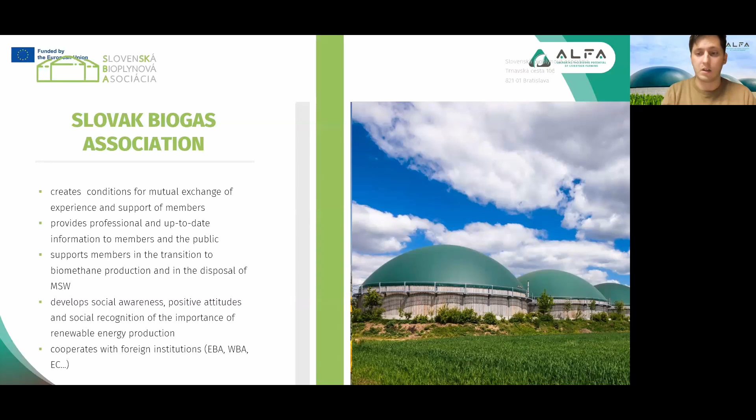Okay, maybe the overall structure of the association. We have specialized working groups, 3 working groups focused on energy, biomethane, and environment. The energy group focuses on heat and electricity. Basically, each group covers practical issues and the regulatory landscape as well. We are trying to address both technical and policy perspectives. We also prioritize education and public relations activities to promote understanding of biogas, as I've already mentioned.

Here we can see some examples from our field visits to biogas plants across Slovakia, and not only Slovakia, Austria, Czech Republic, and Germany as well. We are looking for partners, so if you are interested to work with us, just let us know, and we can pay you a visit or invite you to see our biogas plants in Slovakia.

And this is the example. These are some photos from our conference last week in Zvolen, basically the middle of Slovakia. It's a huge highlight. It brings together experts and stakeholders to discuss emerging trends in the sector, and also challenges. We can see there has been a discussion with people from the ministries. So I think it was a very successful event.

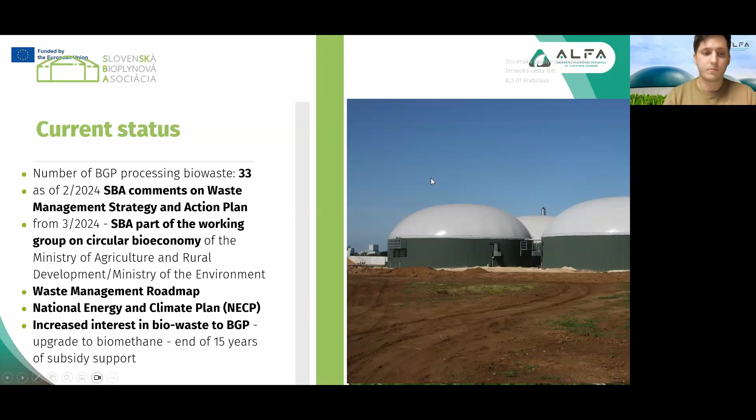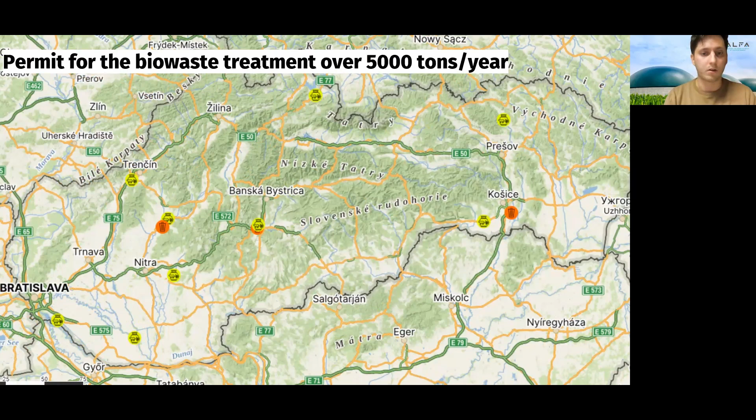And here are the permits for biowaste treatment over 5,000 tons. So if we align them, we can see that the area of Slovakia is kind of covered. Slovakia is not a huge country, so it's approximately 50 to 60 kilometers to each biogas plant from a lot of points in Slovakia, a lot of cities.

Here we can also see the orange dots. These are originally waste biogas plants. We have originally 3 in Slovakia, and the fourth biogas plant focused on biowaste is being commissioned right now.

The hygienization or pasteurization is a necessary process to work with biowaste from animals, and it is necessary for the biogas plant to have one if they want to process something that was in contact with meat or that kind of biowaste.

So the analysis basically reveals a shift towards greater use of biogas from biowaste alongside traditional energy crops, which was the primary source of energy feedstock for biogas plants in Slovakia.

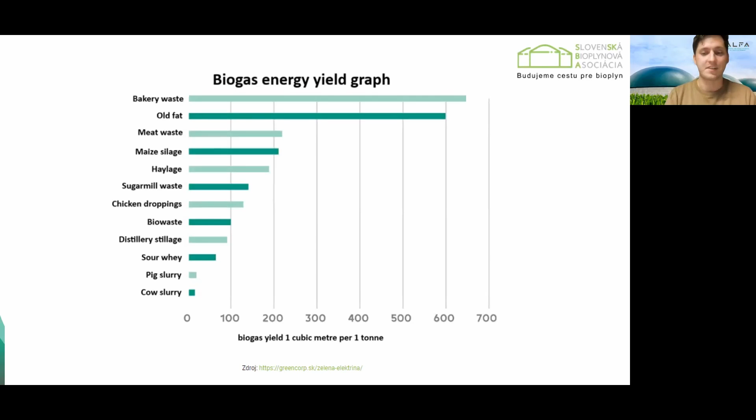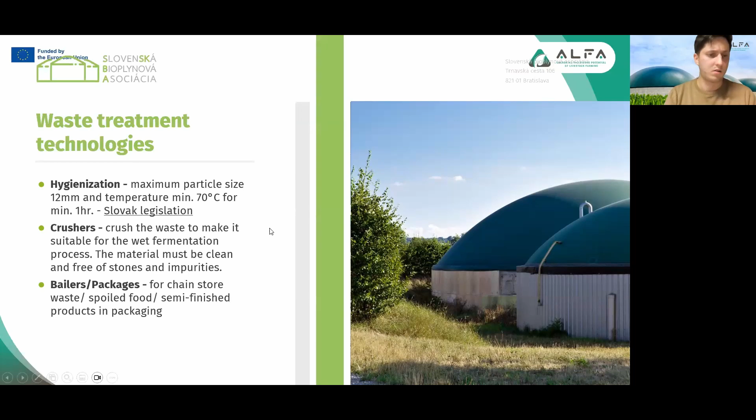To ensure the quality of feedstock, biogas plants strictly use hygienization, as I've mentioned. I think Ondřej will talk more about this, so I guess I will just skip this slide and go to the feedstock that can be processed by biogas plants.

So ideally it is kitchen waste, restaurant waste, oils, fats, food from shops. These are all the feedstocks that can go to the biogas plant and be processed there.

Considering the fact that the biogas plant has the technology for these, there are also animal and plant byproducts from slaughterhouses, dairies, and byproducts from mills and bakeries. So it is possible to work with this at biogas plants.

What biogas plants cannot process is basically paper and paperboard. It can be processed, but the yield of biogas is so low it would be useless for biogas plants to take this kind of waste. It's more efficiently recycled or used for some other end use. Wood is also not very good feedstock for a biogas plant since it can damage the technology, as well as foliage and dry grass. These should all go directly to the composting plant.

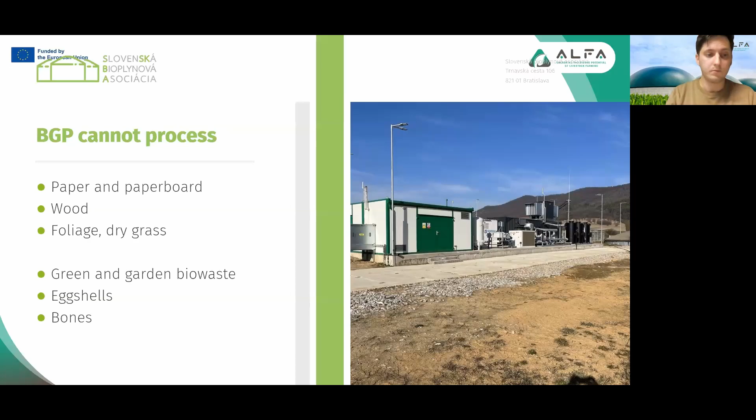So what are some challenges I've already mentioned? There is a need to increase the number of biogas plants in Slovakia, not only in Slovakia but also in the neighboring countries. There's just too low a number of them.

In Slovakia there's a huge problem in the waste management information system that should follow the creation of waste, and thus give biogas plants access to find valuable sources of feedstock. There's also a huge need to invest in technologies for biogas plants, and these investments are mostly on the state in Slovakia. So we are waiting for subsidies and things that can improve the situation in Slovakia.

There's also the issue of composting plants versus biogas plants. According to our thinking, these should never be in opposition, but working together, as we see for example in Austria and Italy. Slovakia does not have this kind of history of building biogas plants next to composting plants, so we are trying to be inspired by these countries I've mentioned.

Today in Slovakia we have more than 100 biogas plants and 2 biomethane plants - one is running, one is almost ready, so soon we will have 2 there. But more than 20 plants are temporarily out of service in Slovakia. There is a guaranteed feed-in tariff for electricity, valid for 15 years, and the first biogas plants will be out of this tariff from next year.

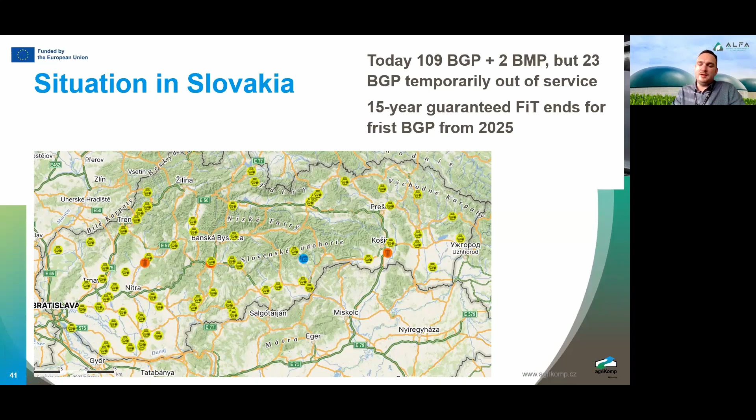In the Czech Republic the situation is a little bit different. We have more than 600 plants and 10 biomethane plants. The guaranteed feed-in tariff is for 20 years, not 15. So the first projects will be out of electrical subsidy since 2028.

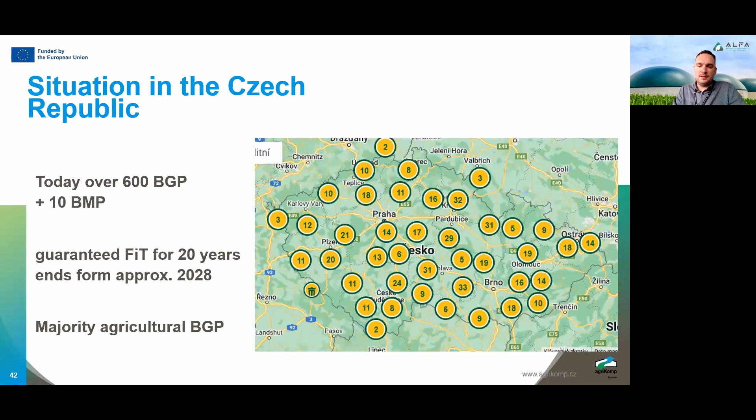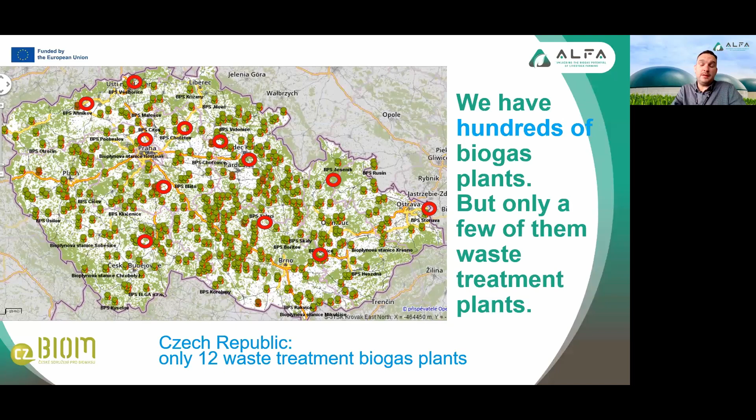The majority of plants in Czech Republic and in Slovakia are agricultural. In the Czech Republic we have 12 pure big waste treatment biogas plants - 12 big projects. And in Slovakia, as David said, 3 big projects for waste treatment in biogas production.

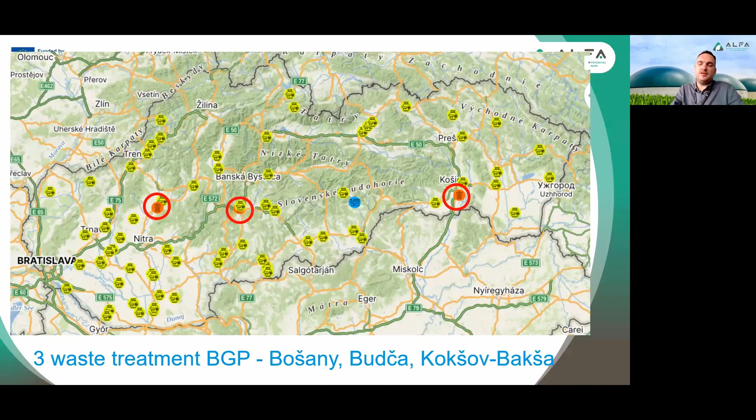Regarding the feed-in tariff, there exists one in Czech Republic for biogas power plants constructed until the year 2012, which is 175 euro per megawatt hour of electricity right now. And one special tariff for biogas power plants from year 2013, which is lower, at the level of 153 euro.

In Slovakia the situation is much better. The price for electricity in feed-in tariff is much higher, 220 euro. But the problem is with the length of the operational subsidy, it's shorter than Czech Republic.

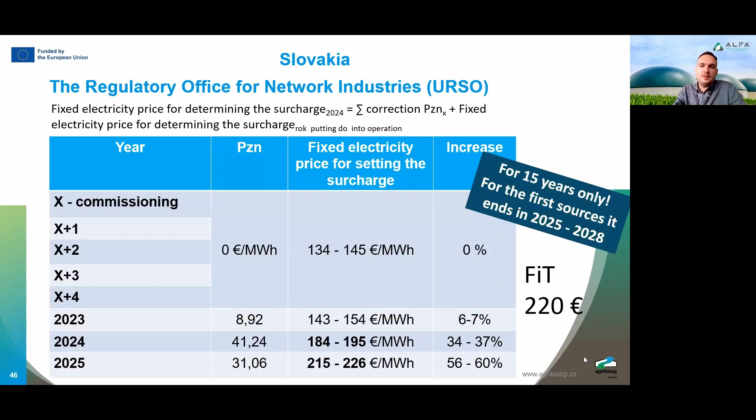Regarding the technology distribution, there are two big technologies in anaerobic digestion: dry fermentation and wet fermentation. Both technologies have advantages and disadvantages. From the point of view of substrates, dry fermentation is much better because you don't have to care too much about the quality of substrates. But from the point of view of energy production, wet fermentation wins.

Let's take an example with 30,000 tons of bio-waste, from which in dry fermentation we can make almost 4,000 megawatt hours of electricity per year. In a wet fermentation...

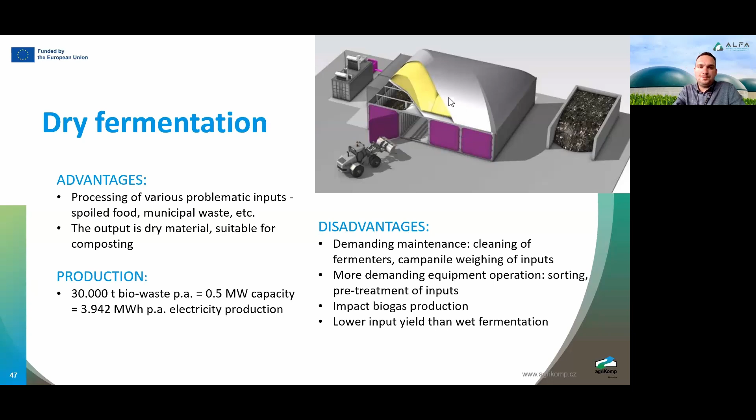we can treat various materials, but not too complicated ones. We can manage also the dry grass in this technology without problems. And regarding the production of electricity, it's doubled. So from the same amount, 30,000 tons of bio-waste, you can produce almost 8,000 megawatt hours of electricity per year.

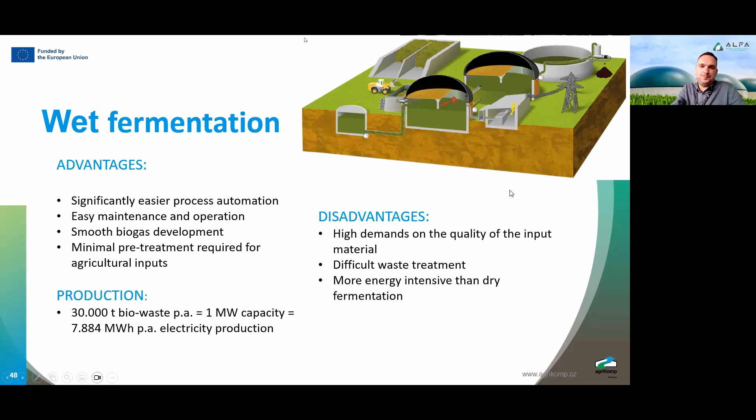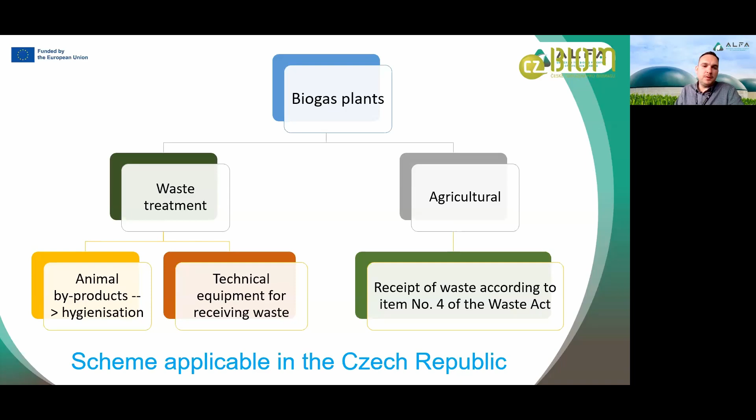The plants can be divided into agricultural and waste treatment plants, and principally all of them can feed wastes, but there are some technical and legislative limits. In agricultural plants, principally you can feed plant-based wastes. In waste treatment plants, you can feed everything you want, but if you feed substrates containing animal byproducts, you have to add a hygienization unit there.

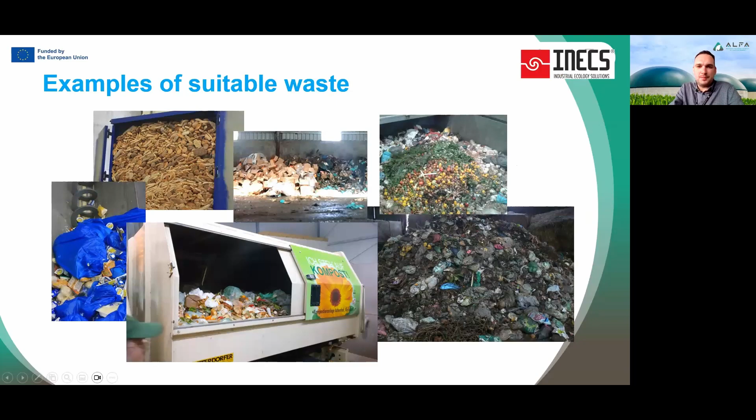Here are examples of suitable waste: food waste. From the pictures, you can easily guess where the biggest problem is in the food waste - it's packaging. Luckily there exist technologies for depackaging and for getting rid of these unwanted impurities, to produce high quality biosubstrate for anaerobic digestion, and technologies which can remove the packaging and other solid materials out of the system.

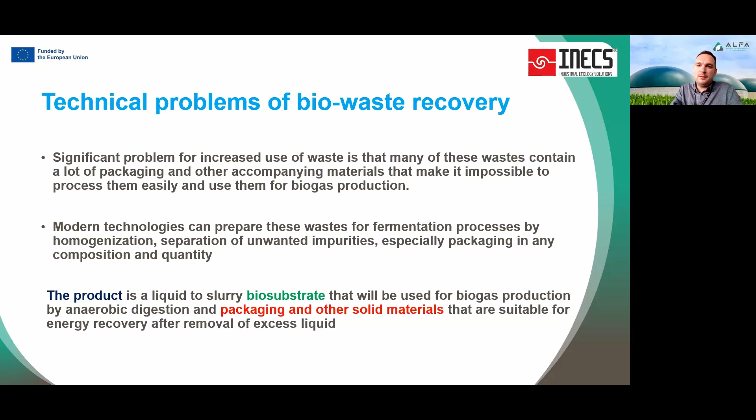Here I want to thank Peter Benko from INECS company for his examples.

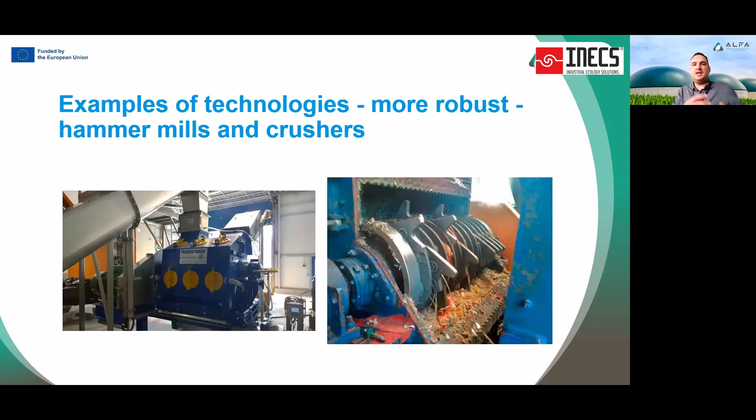On the following pictures you will see different technologies. First picture is a hammer mill, a big robust crusher which can destroy almost everything. The crushed material is mixed, so packages and biomaterial come out together. For the same purpose there also exist simplified solutions which are not as strong but much cheaper - manual blenders and cutting pumps, which can also be used for disintegration of the inputs.

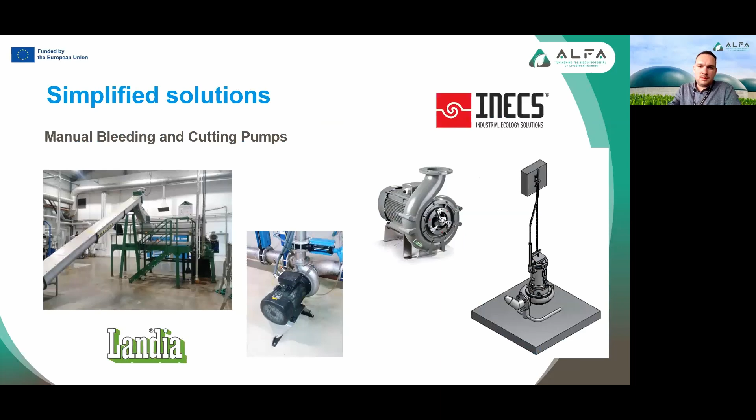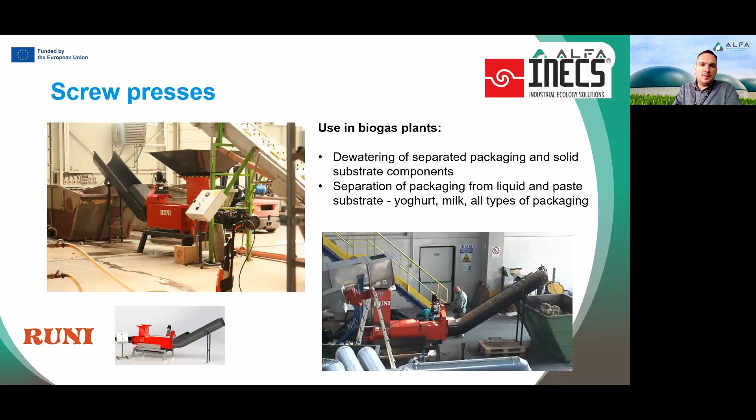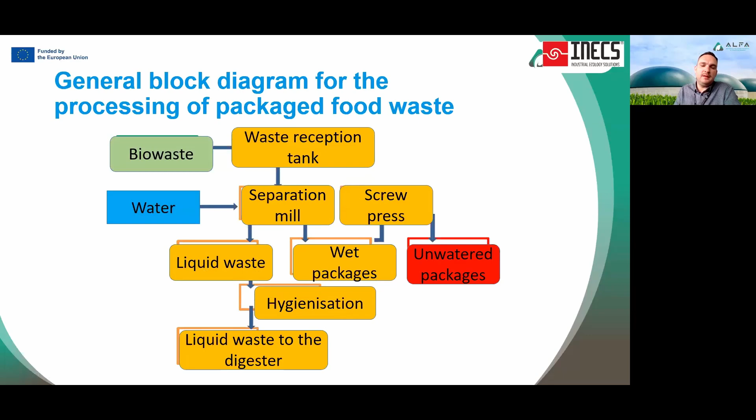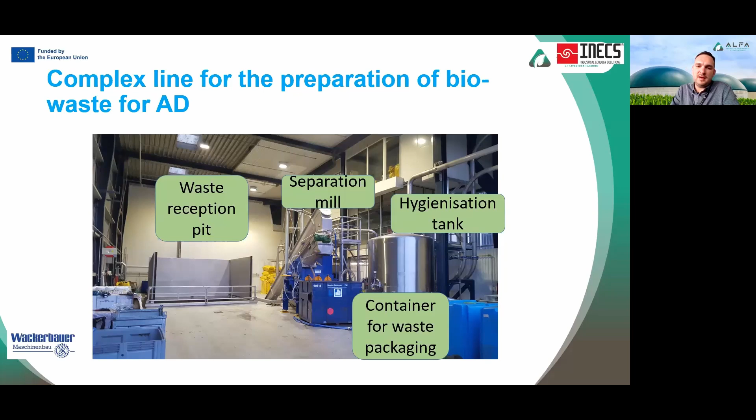On the picture, a typical layout of the preparation of waste for AD technologies. Everything is in a big hall, an indoor solution, because the potential smell should be reduced from this technology. There is a waste reception pit, then separation mill, hygienization tank, and also a container for waste packaging.

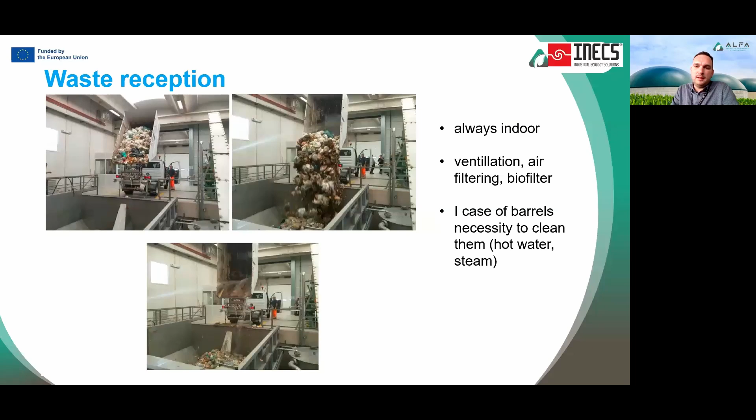On this picture you can see waste reception. As I said before, it has to always be indoor. The reception hall should be ventilated, there should be air filtering, and usually there is a big biofilter outside the hall which cleans the air. The barrel solution you will see in another example.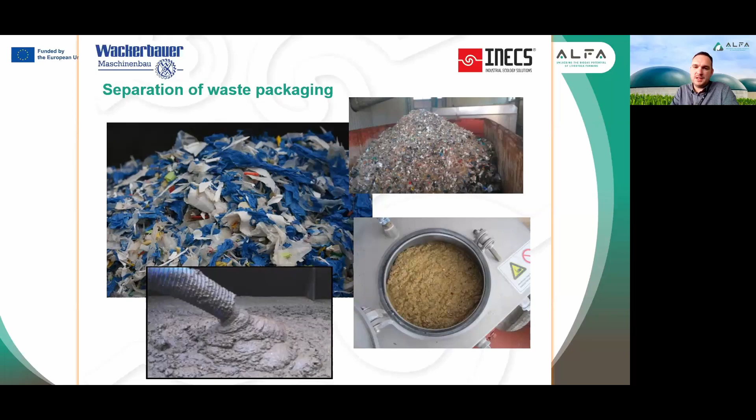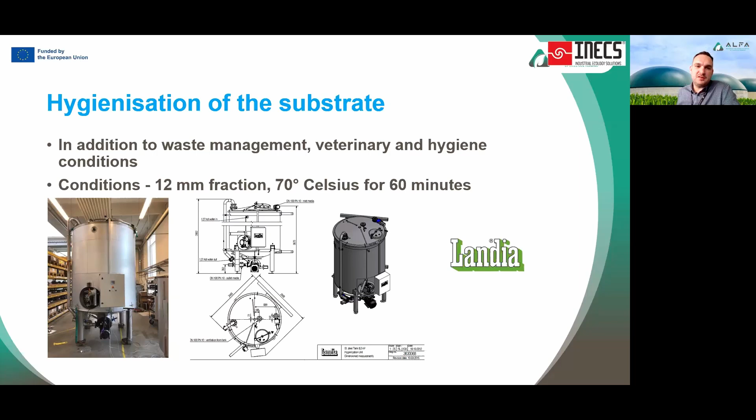Let me introduce one example from practice: the plant Všebořice in Czech Republic, in Ústí nad Labem. We constructed this plant and it's been running since 2013, so more than 10 years. It's a semi-waste treatment power plant and semi-agricultural plant.

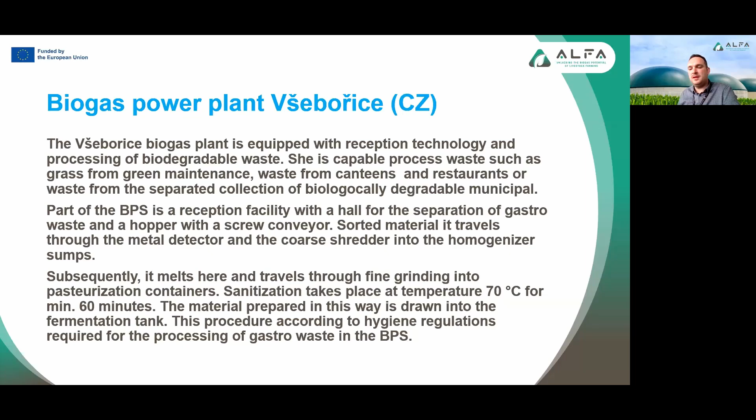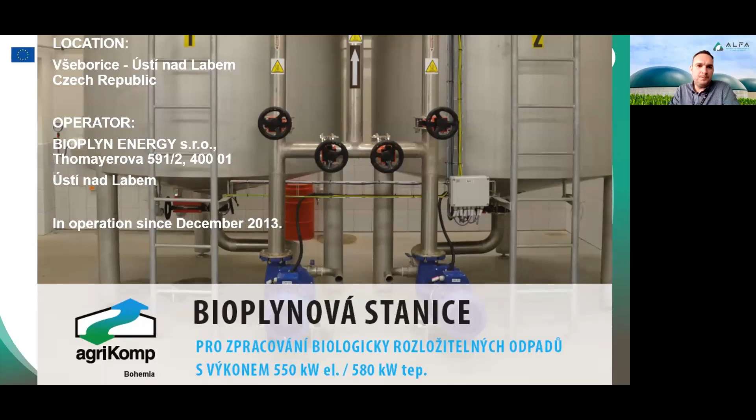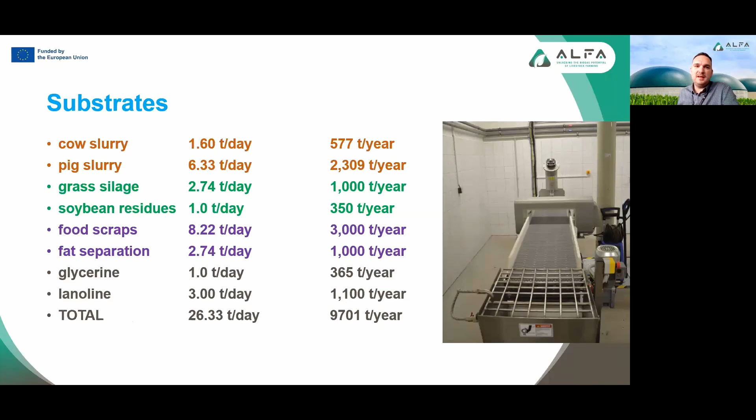This plant has a CHP unit, which can produce 550 kilowatts of electricity per hour. And here are the substrates. So you can see that we feed agricultural substrate, green and brown substrates, food waste in purple color, and, let's say, industrial waste: glycerin and lanolin.

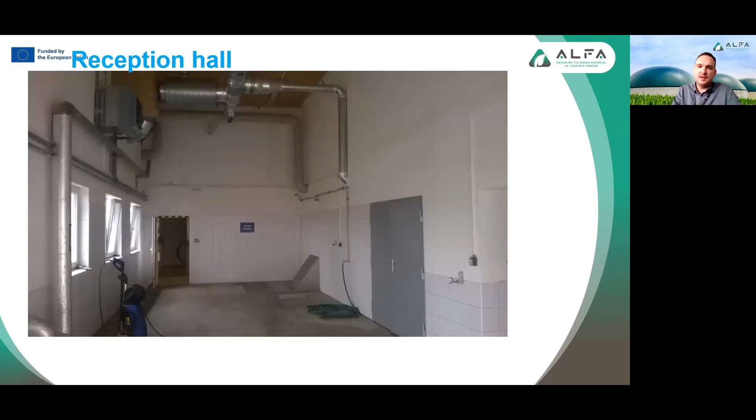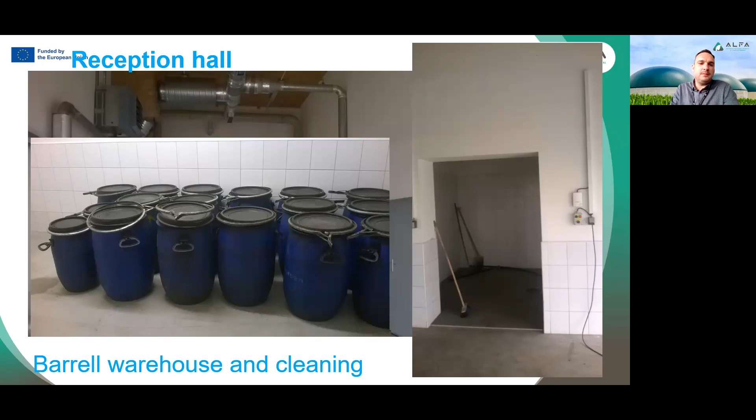Let me introduce you the hygienization technology, or the food waste reception technology. There is a big reception hall. In the reception hall is a barrel warehouse and cleaning of the barrels. The food waste is transported from restaurants and canteens in these, I think, 50 or 60 liter barrels. In the ceiling, there is a big ventilation, which is connected to the biofilter outside of the building.

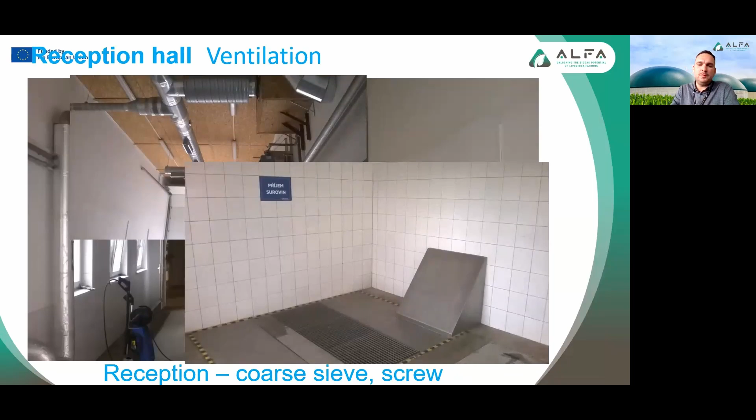And at the end of the building, there is a reception. So it's a coarse sieve on the floor. And this part is a screw which transports the material to another room. In the second room, on the right side, you see a screw which transports the material to a running belt. There is a magnet on the running belt in the center. The running belt is there for visual control and for possible manual separation. So a possible knife or fork is detected by the magnet, but a possible towel, let's say, from the restaurant should be controlled visually and manually separated.

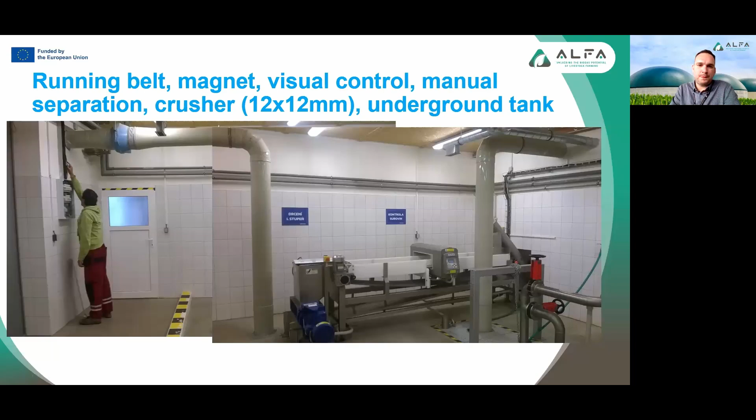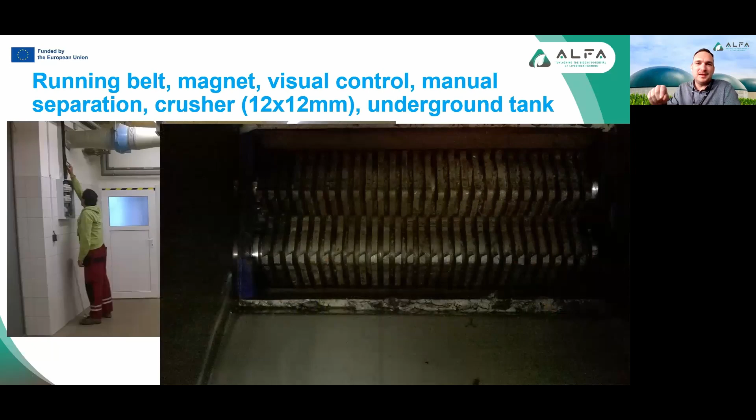The blue thing in the center is a crusher, and under this crusher there is an underground tank where the crushed material falls. This is the detail of the crusher. It's difficult to set it correctly. When we started the operation, the biggest problem were tangerines, because they were jumping on the tubes and it was really difficult to set it.

The crushed material then travels by pump to a hygienization tank. We had 2 parallel tanks there. We have to boil the material at least 1 hour at 70 degrees, but reaching this temperature took, let's say, 8 to 10 hours approximately.

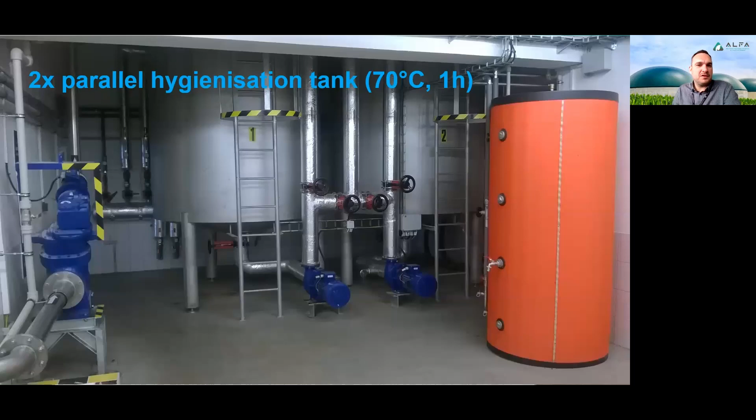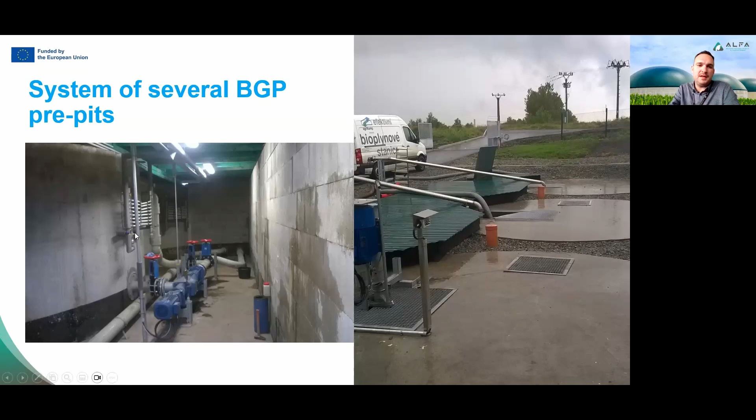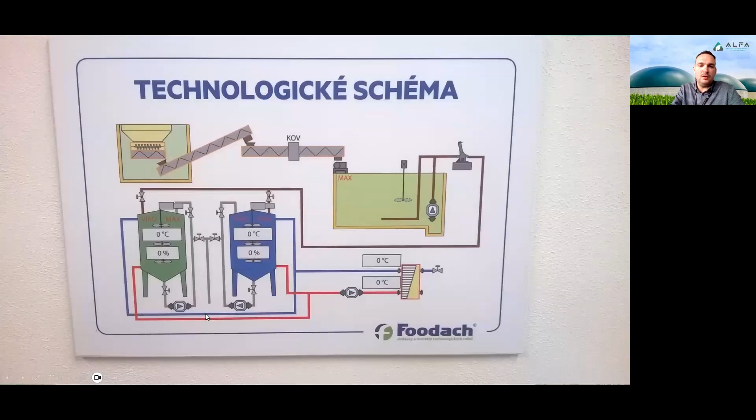This material, when it's hygienized, can be pumped directly to the anaerobic digester, and the project also has a system of several pre-pits for dosing other liquids which don't have to be hygienized, like lanolin and glycerin, which I mentioned. Some of these pits are preheated. It's visible on the left side, white pipes. This is the very simple technological scheme of the whole system. And the center pipe between the green and blue hygienization tanks goes to the digester.

Here I have a short video for you. So it's a reception hall. This is the sieve for reception and sieving of the materials. This pump pumps the material to the hygienization unit from the underground tank; screw, running belt, magnet, and finally the crusher here. And the material ends here in the hygienization tank.

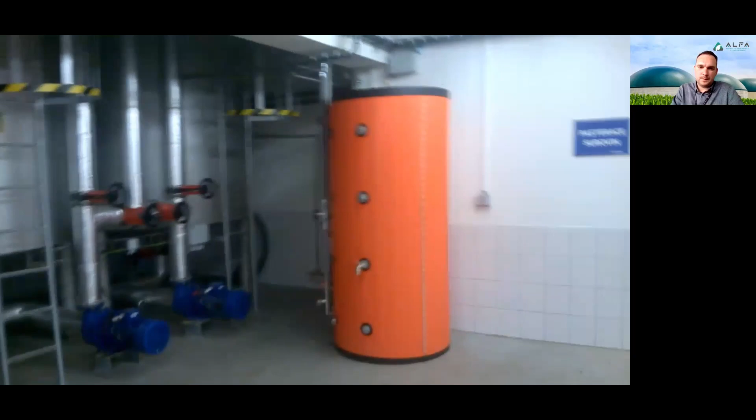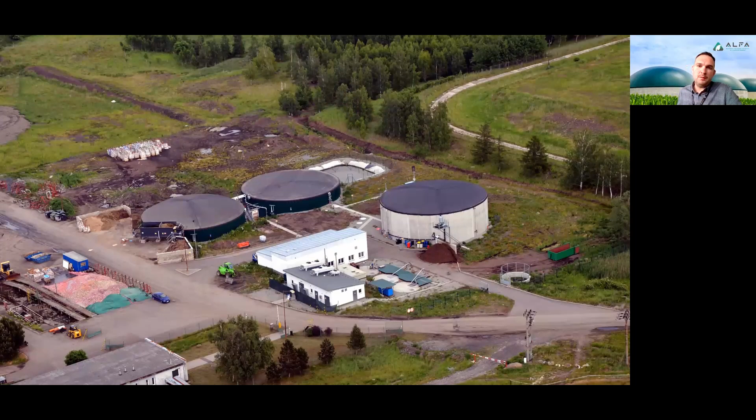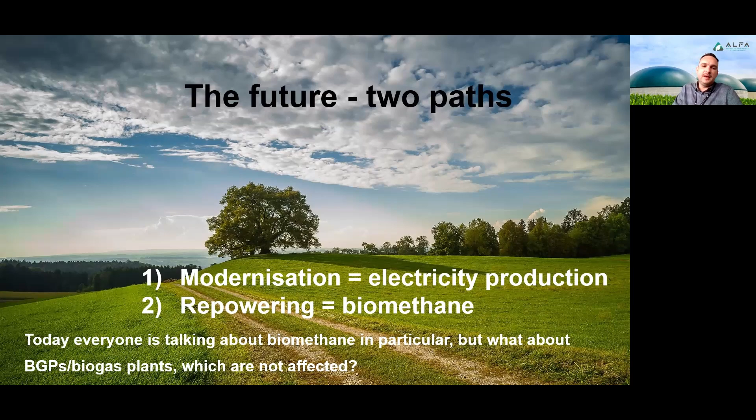So let me go to the future of the biogas sector. There are 2 paths. One is modernization and continuing in CHP production, and the second is repowering to biomethane. CHP biogas plants can do the modernization in the Czech Republic and also in Slovakia, as David already mentioned. There exists a recovery plan which can give you governmental money for your project.

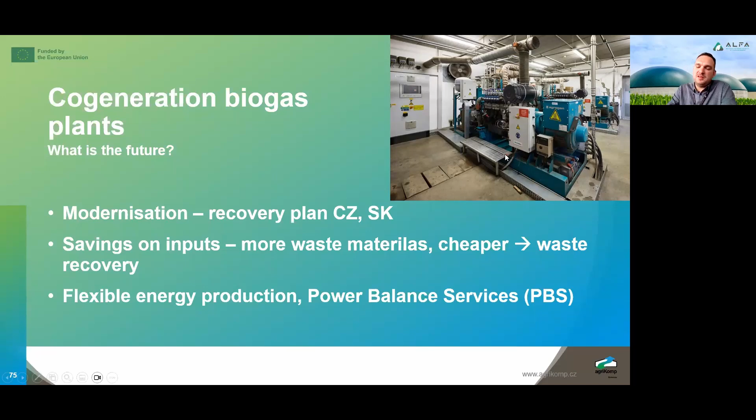And definitely the future for CHP plants is savings on inputs, because there is no more future in energy crops right now, and waste materials will be very important for the plants' future. And again, repeating David's information, flexible energy production and power balance services are definitely the future for plants producing electricity in CHPs.

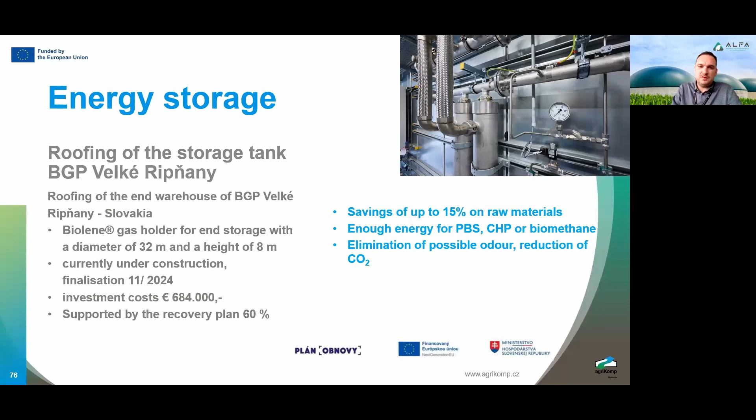I will show an example of modernization of a plant, which we are finalizing right now in Velké Ripňany in Slovakia. It's a plant where we added a big gas holder on the storage tank. Because of this gas holder and the heating of the storage tank, we increased the fermentation capacity. So now we save around 15% of raw materials, and we have enough energy for the power balance services, for example.

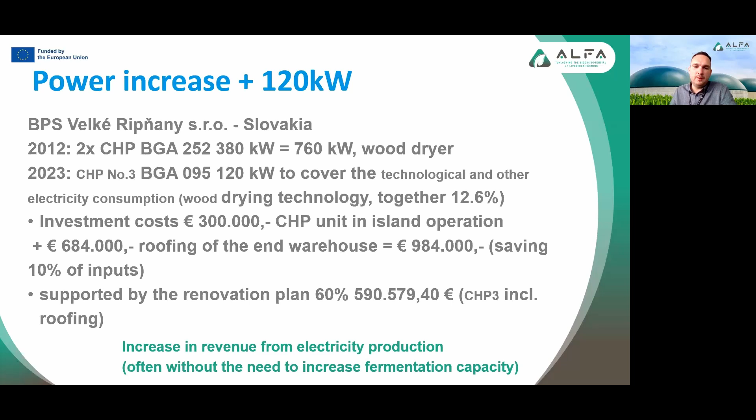In Czech Republic, we are working right now on a design of a municipal waste biogas plant. Very interesting project, a little bit different. There are not too many municipal plants at all. So we are working on this. We are in the feasibility study right now. We consider different solutions. I hope there will be biomethane production with a CHP unit. We will see. And this project should work with restaurant waste, waste from maintenance of the green areas, from the public biowaste collection, and also with energy crops.

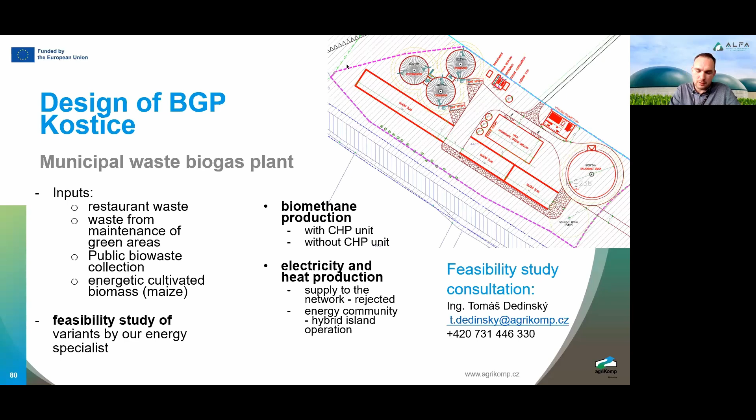Biomethane, generally, in my branch, is the most sexy topic right now. Definitely, everybody wants biomethane. There are a lot of subsidies in all countries across Europe. There is a growing free market. Unfortunately, the feed-in tariff in Czech Republic is insufficiently high. So we are sad, but Slovaks are more sad because they miss the feed-in tariff completely. They have to work with trading on the market.

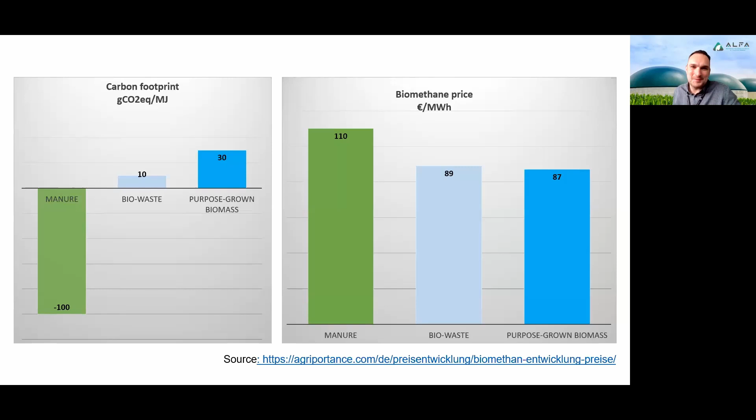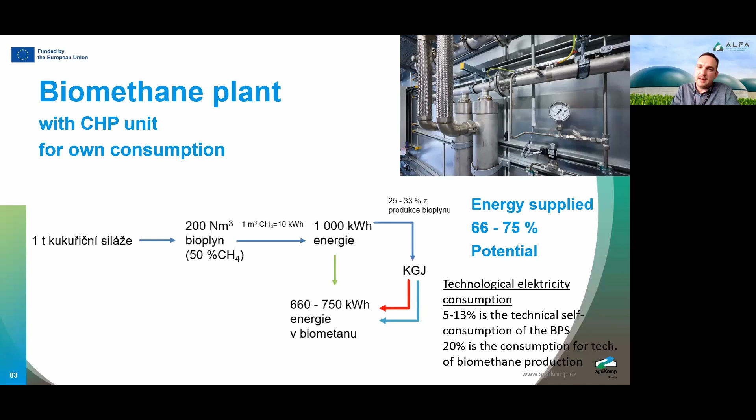If you want to compare the prices for electricity, and I hope you remember the price in Slovakia, 220 euro, as I mentioned in the beginning, you have to consider the different efficiencies of a CHP unit and upgrading unit. And if you do the energy conversion, you get two magical numbers: 2.5, which is the efficiency number, and 1.2, which is the higher self-consumption of electricity. If you do the calculation, the equivalent price for biomethane calculated from electricity is 106 euro per megawatt hour in biomethane, and today's price of manure biomethane is 110, waste biomethane 89.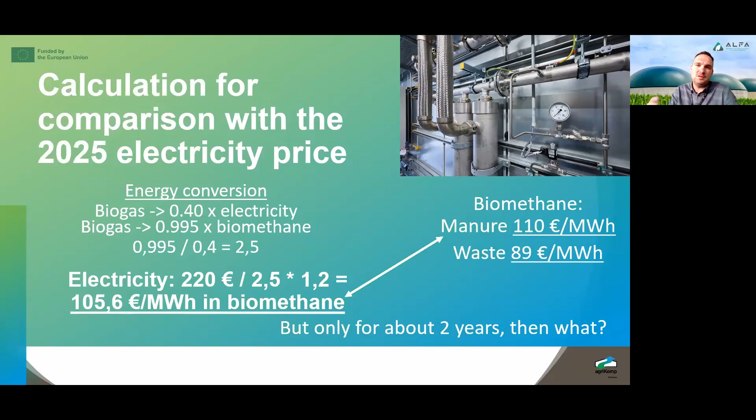So here is the answer why in Slovakia there are so few plants today. But this state will last only for 1 or 2 years, I hope, because the electricity subsidy will end there.

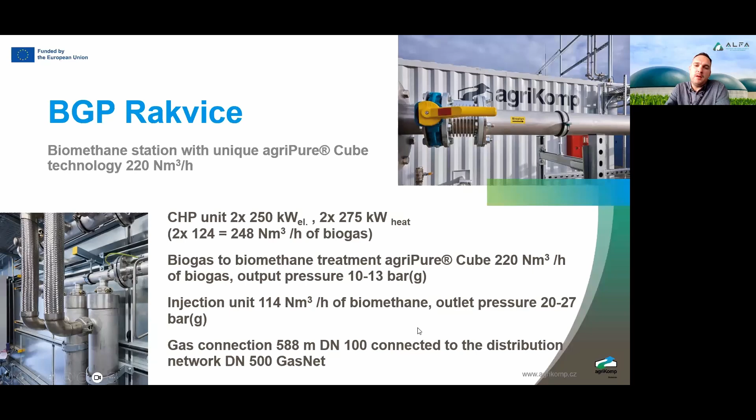This is the example from Czech Republic. It's a plant from 2013, which I'm operating. We did the modernization this year. So now we have a biomethane plant. This biomethane plant is connected to the gas grid. The connection is quite short, 600 meters, and we are able to inject around 110, 114 cubic meters of biomethane per hour today. We produce biomethane 100% from manure. We use cow manure and chicken manure.

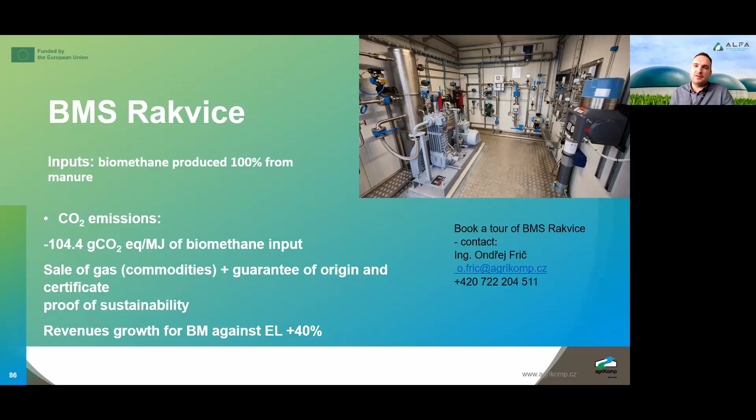We have very, very low CO2 emissions, minus 104. And we now sell gas in one package, and in a second package, gas, guarantee of origin, and certificate of sustainability. What is perfect is that our revenues grew with the biomethane by 40% compared to the electricity sales last year.

This is the example of a pretty new plant we are working on right now in agriKomp. It's a completely new plant in Krakořice. It's a small village close to Olomouc in Czech Republic. This plant is completely new, capacity 500 cubic meters of raw biogas, and we are almost ready, technically finished, doing the first revisions and tests, and I hope in December or in January we will be ready to start the trial operation.

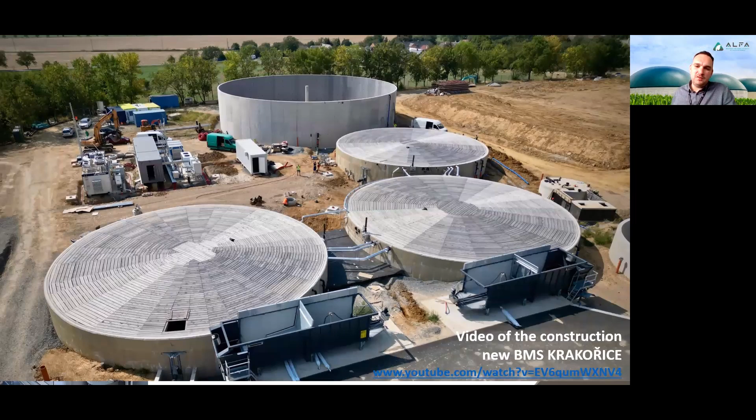And from the social point of view, it's the most expensive fuel for the plants. So please minimize the waste, think about it, act responsibly, and try to avoid waste production.

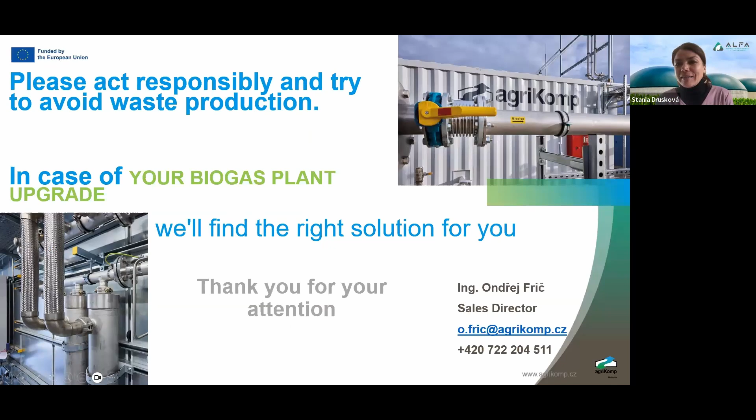Q&A session. So the first one, I don't know for which speaker it is, but the question is: can food waste, such as bakery byproducts, be efficiently processed in biogas plants? Additionally, is it common for biogas plants to pay for such materials, or do waste owners typically pay for the processing service, and how much on average? I don't know which one, maybe. I think it's for me. Okay, go ahead.

Bakery byproducts are very good. There are not too many of them. But if you take this directly from the bakery, not from the shops, you have an advantage that you can avoid the packaging. So for example, in Rakvice, I'm buying the bakery from the Penam company, and I buy roughly 5 or 10 tons per month, so really a small amount.

The material is out of packaging. There are rolls, breads, cakes, pastry, flour, everything together, but always without packaging. And I pay 1,000 crowns per ton, so it's 40 euro per ton of this material. And it's really good. It produces a pretty high amount of gas in comparison to the corn silage, let's say double. So roughly 400 cubic meters of raw biogas per ton.

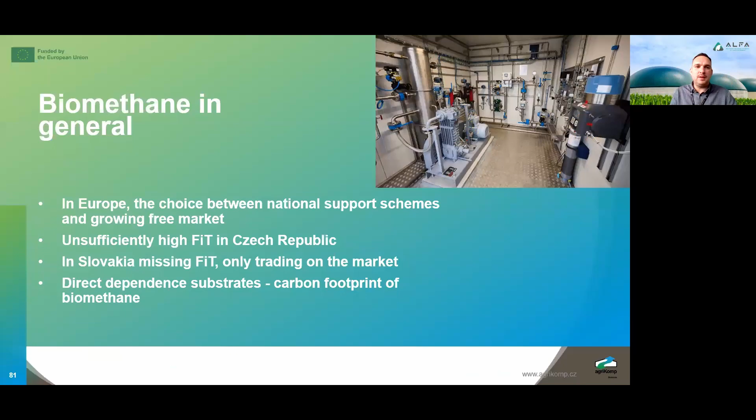If you want to digest only manure, you will have serious technological problems and biological problems. So you have to mix it with something, and the ratio is, let's say, 1:2, 1:3, 1:4, and you can add quite a lot of manure in the system, but not only manure.

And regarding the second question, if you remember the prices for electricity, there were numbers: 150 or 170 euro per megawatt hour roughly in the Czech Republic, and 220 euro per megawatt hour in Slovakia. This is the feed-in tariff. But from these prices, the price of electricity itself is 92 euro right now.

And there is no future in feed-in electricity tariffs across Europe for biogas. So with the price of 92 euro, you cannot run the biogas plant. It's not possible with electricity production. So if you have manure, and remember my graphs with the CO2 footprint and with the prices, definitely think about biomethane production. With injection to the gas grid, it's the easiest project. With CNG technology, with LNG technology, whatever, but definitely biomethane.

Okay, thank you, Ondřej. David, would you like to add something? To this question, not really, but I would like to return to the first question, because it's a really good question and I don't want to go around it. It asks: is it common for biogas plants to pay for feedstock, or do waste owners typically pay for the processing service, and how much on average? So I would like to answer this.